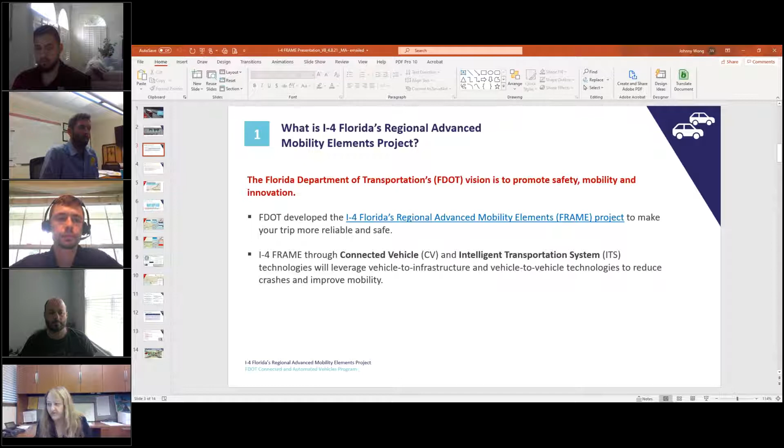What is the I-4 FRAME project? As you know, our vision for Department of Transportation is to promote safety, mobility, and innovation. And the I-4 FRAME is a connected vehicle and ITS project, and the technologies associated with it will leverage vehicle-to-infrastructure and vehicle-to-vehicle technologies to reduce crashes and improve mobility. Next slide please.

Why do we need the I-4 Frame project?

As we know, the I-4 corridor from the East Coast to the West Coast, from Tampa to Orlando, is an artery for economic activities. Also, we have 75 million visitors that visited Orlando in 2018.

Every day, 150,700 vehicles travel through this corridor. From looking at the crash data from 2016 to 2018, 45 fatal crashes and approximately 2,100 injury crashes were reported on I-4. If any of these crashes result in a fatality, the roadway will be closed for approximately 4 hours for the homicide investigation.

I-4 averages 2 lane closure events per day and 1 full directional closure every 11 days in 2018. So based on this crash history and the congestion, it makes the travel time unreliable, and it also decreases safety. This is the reason why this project is so important.

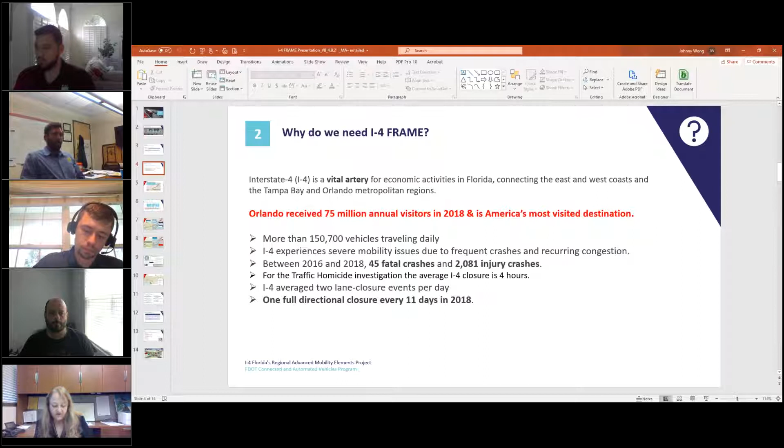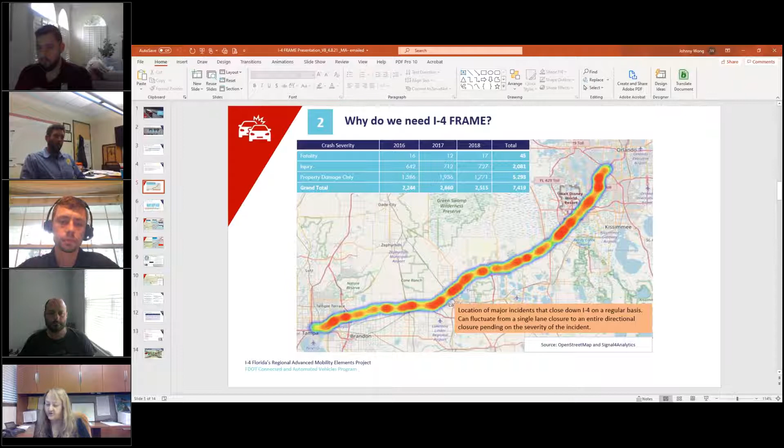Where is the I-4 Frame project going to take place? As I said before, it's going to be from Tampa to Orlando. It's going to include 77 miles on I-4, 200 miles of arterials, which is basically the surface streets between these areas, and it's going to communicate with 381 traffic signals.

The project will be installing ATCs, RSUs, CCTV cameras, and Bluetooth detectors at key decision points along the diversion routes, which I will share with you in the next slide. Specific signals will also include vehicle detection, both radar and video, and blankout signs to help assist motorists at these decision points.

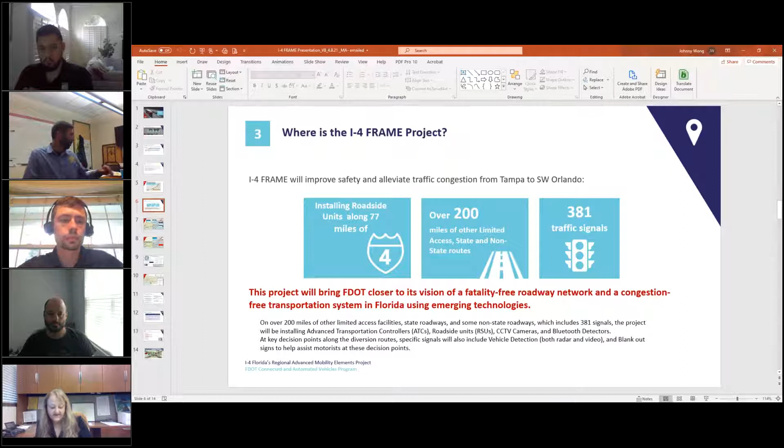In District 7, it's going to include 25 miles of I-4, 80 miles of arterials, 30 miles of the State Road 60 CAV project, and 3 miles of the Turnpike. District 1 will include 30 miles of I-4, 100 plus miles of arterial, and 24 miles of the Turnpike. You can also see District 5 and the Turnpike.

As many of you know, the District 1 improvements will be managed out of the RTMC for District 7. The reason I wanted to share District 5 and the Turnpike with you is, after all, this is a regional project, and there are many destinations within this region, from the international airports, from universities, from Walt Disney, and many other destinations.

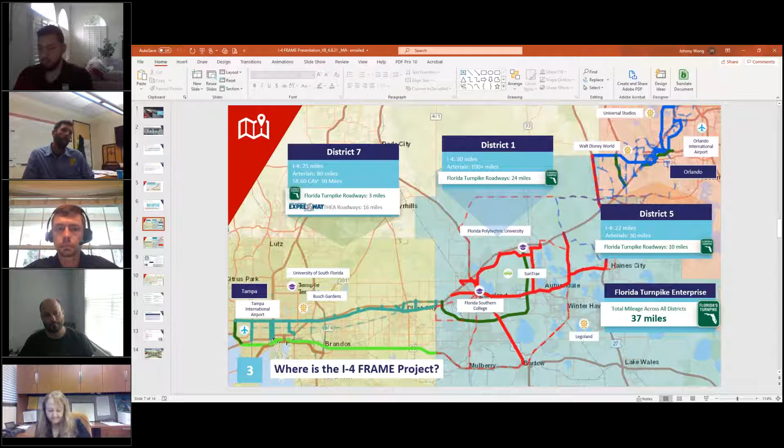So again, this slide shows where the I-4 Frame project is. There are a lot of colors on this slide, I understand, but what I want you to concentrate on as far as what's happening at District 7 is the area on the left. What does this project do?

The main concept and the main improvement as far as safety, and giving the traveling public alternatives in case there's a backup on I-4. As I said before, the I-4 is the brown, and on the left side you can see there's a teal color that shows the primary diversion routes for I-4 backup, and that's Hillsborough Avenue, in teal. The secondary diversion route for District 7 is MLK, which is a dashed teal line, and that is also in conjunction with State Road 60 as a secondary route, which gives the traveling public alternatives during the congestion of I-4.

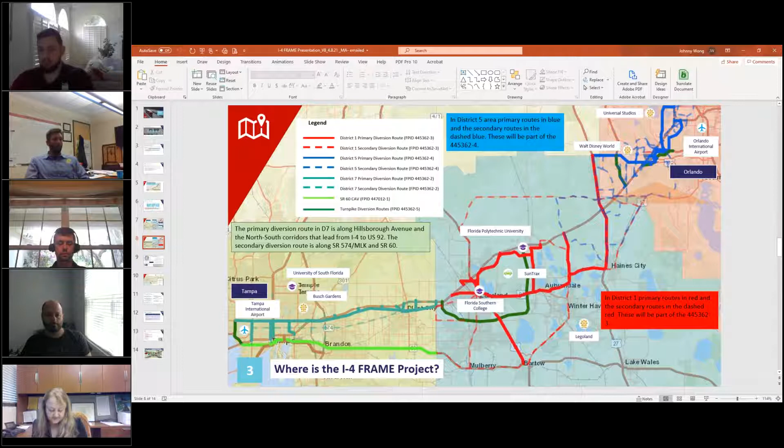Now, as far as how the I-4 FRAME works, many of you are familiar with these terminologies: the roadside units, the onboard units, and the detection devices. The main function of the roadside units is to facilitate communication between vehicles and transportation infrastructure by transferring data over dedicated short-range communication and cellular vehicle-to-everything, CV2X. The RSU gathers the basic safety message from the onboard units and other local traffic systems and communicates the data back to the RTMC. The information is analyzed, and the traveler information message is broadcasted from the RSU to the vehicle's OBU in order to provide information to the motorist.

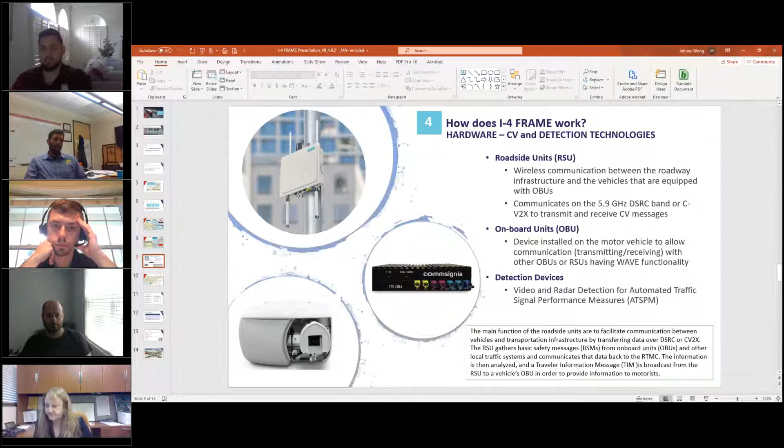RSUs will be installed at roughly 1 mile spacing along the limited access facilities, I-4, I-275, I-75, and we're going to use existing cameras or embed poles to install them.

On the arterials, the RSUs will be placed at all intersections, selected mid-block crossings, and emergency signals. At major destinations, as I mentioned before, we're going to have the CCTVs, Bluetooth detectors, video, blankout signs, and detection being added so we can get automated traffic signal performance measures at these locations.

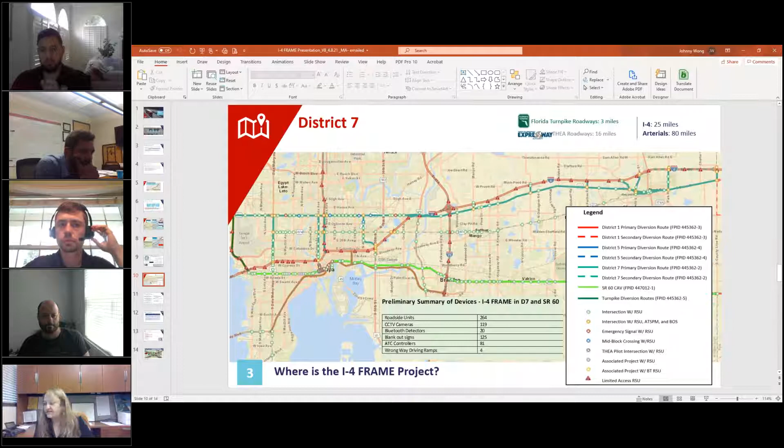So how does the I-4 frame work? Which devices will be talking to each other, and what are the elements and notifications that travelers will be getting?

For instance, it will have the traffic incident management element, which would broadcast traffic incident information to vehicles, about maintenance, about construction information, about evacuation routes.

It will have the speed harmonization message system, which broadcasts vehicle speed advisories to warn drivers of reduced speed recommendations based on the roadway condition ahead. This is important because it gives drivers an idea that they need to slow down, and hopefully this will minimize rear-end collisions.

The work zone traffic management is very important, especially in Florida, where there's a lot of roadway construction going on to improve our roadways. This broadcasts information on back of queue, roadway hazards, roadway weather conditions, and roadway surface conditions for construction projects.

Freeway back of queue warning broadcasts vehicle stoppage to minimize or prevent rear-end or other secondary collisions. For instance, you're coming around the curve and traffic has stopped in front of you—it gives you a message that you need to slow down and potentially stop.

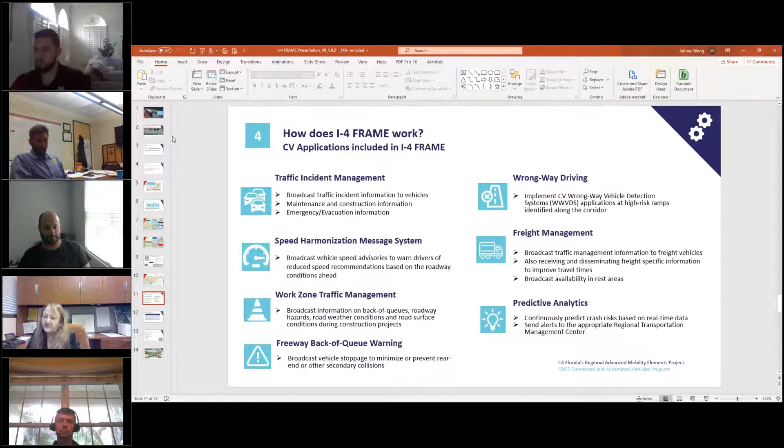And the last is predictive analytics. As we all know, this is very preliminary, and I think the City of Tampa ATMS project, by using historical traffic information, is probably one of the first projects that's going to be able to provide this information.

As I mentioned, there are two contracts. Contract number one will include the I-4 frame project in District 7 and the State Road 60 CAV project. The design will be completed in November 2021 for both projects, and the contract will be let, with the contractor selected in February 2022.

Currently, these are the approximate budgets: 11.5 and 1.7 million respectively for these two projects.

The second contract will include District 1, District 5, and the FTE portion of the I-4 frame. The design will be completed in March 2022. The contractor will be on board in July 2022, and the approximate budgets are 9.3, 3.7, and 1 million respectively for those projects.

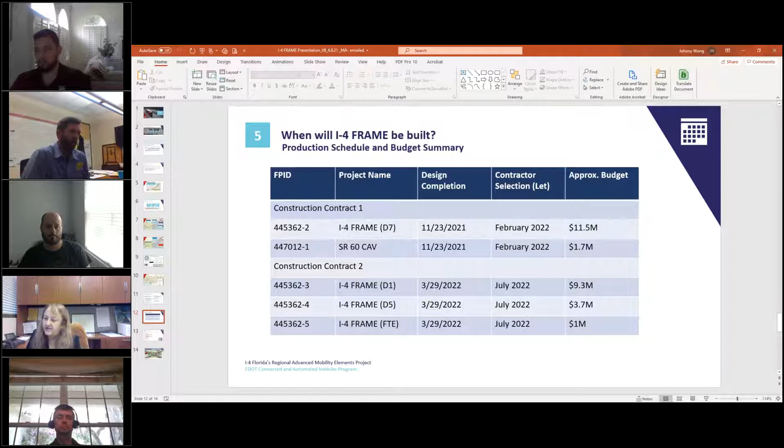The department has already selected the consultant working on this project, Metric Engineering. As I mentioned, Dale Cody is also on this call for any questions regarding the project.

Design completion, as I mentioned, is November 2021 for the District 7 portion, and the rest in March 2022. Construction will begin for District 7 in June 2022, and for the rest of the project in October 2022. And that's the end of my presentation.

This one we don't have to use, I just put it there for information, but I think we can leave it out.

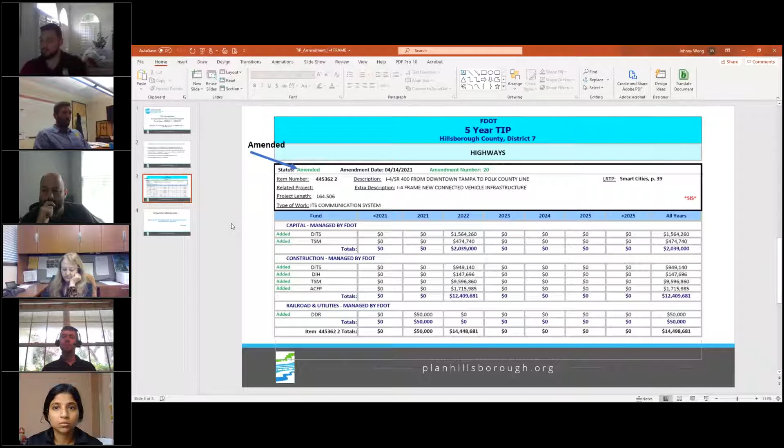And maybe if there's no messages to pass forward, maybe a statement along the lines of, if we were able to take action on this, we would have supported it. All right, I think it's okay. Let's do this then. Passing along the message that in the absence of a quorum, we are unable to recommend as a board approval. However, we would anticipate making said recommendation when we're officially able to do so.

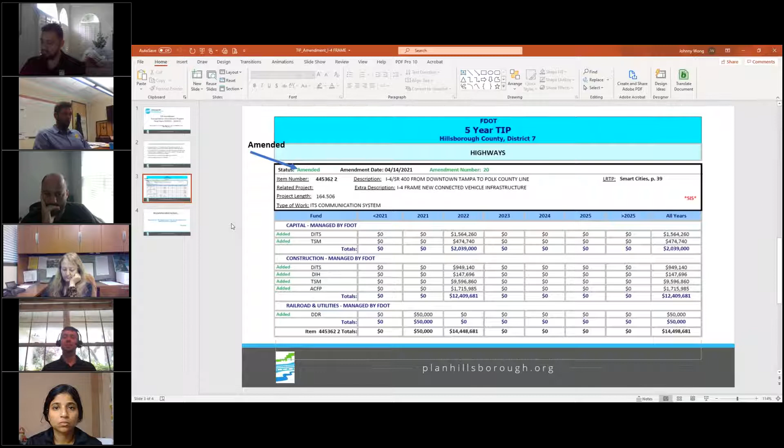Does that adequately speak for the board members present? I think so. I did not suspect any opposition to that. Okay, so thank you all, and thank you, Vishaka.

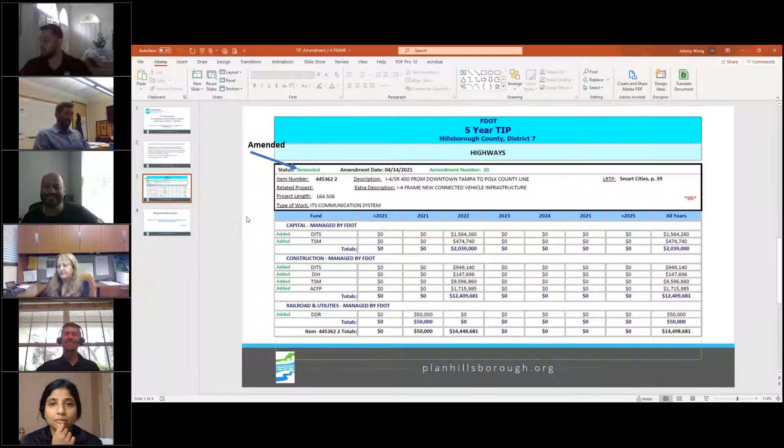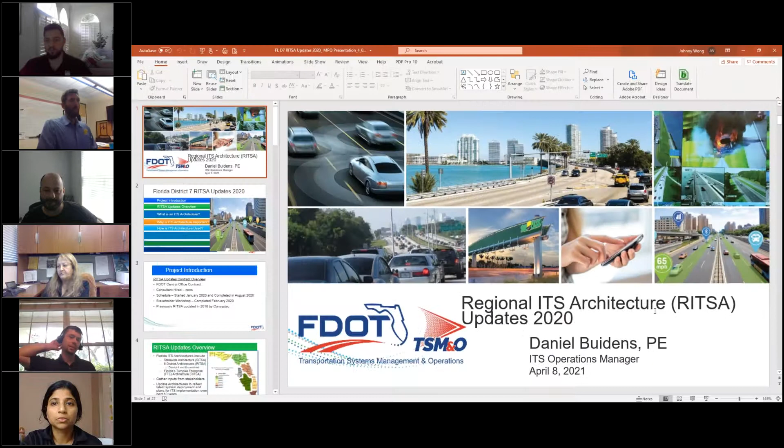And with that, we can move on to the next item on the agenda. Actually, I'll say, sorry, that was going to be our in-roadway lighting presentation. We had a little bit of a scheduling snafu on that, and it's going to be tabled until our July meeting. We can look forward to hearing all about that. I've heard it's a compelling presentation that should hold our interest well, but we won't be hearing it today.

So with that, I will turn it over to Dan Buidens to talk about the regional ITS architecture update. Thanks, Brandon. Thanks, everybody on the call. I don't know if I can promise a compelling presentation, but I certainly can promise that it will be informative. I'm Dan Buidens, the ITS operations manager here at FDOT at the Tampa Bay SunGuide Center. I'm going to present to you guys the regional ITS architecture update.

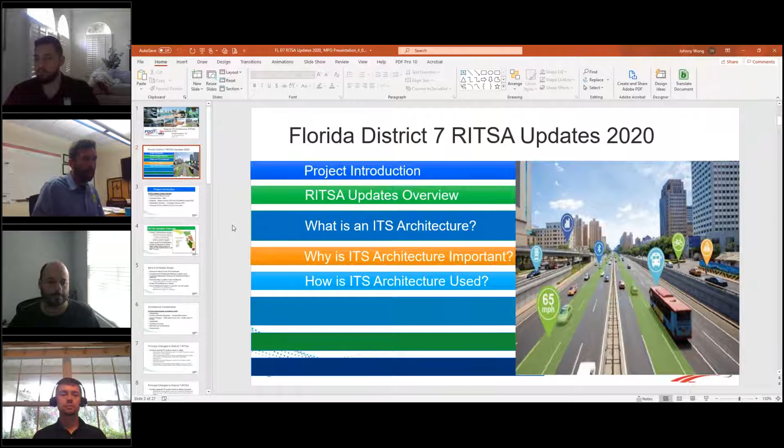Let's go ahead and just hop into it. Next slide, please. So in today's presentation, I'm going to cover the update that was done in 2020, but I want to introduce what the project was about, what a RITSA update really is, what is ITS architecture, why it's important, and how it's used. Next slide, please.

Just to introduce the project, the RITSA update was put out to bid by the central office, and the consultant hired was Iteris. The work was scheduled to begin in 2020, and the team was selected at the tail end of 2019. It involved a stakeholders workshop, one of the very beginning activities, completed in February of 2020. Previously, the RITSA, or Regional ITS Architecture, was updated in 2016 by a firm called Consystec, then taken over by Iteris in 2020, hired out by the central office. Next slide, please.

Just to give you a brief overview of the RITSA update: the Florida ITS architecture has a statewide architecture that's further broken down into different regions of the state. There are basically 6 regions composed of the FDOT districts. District 6 and District 4, down in the southeast portion of Florida, are combined as one region. I think they have enough characteristics and elements that those were combined as one whole RITSA for that area.

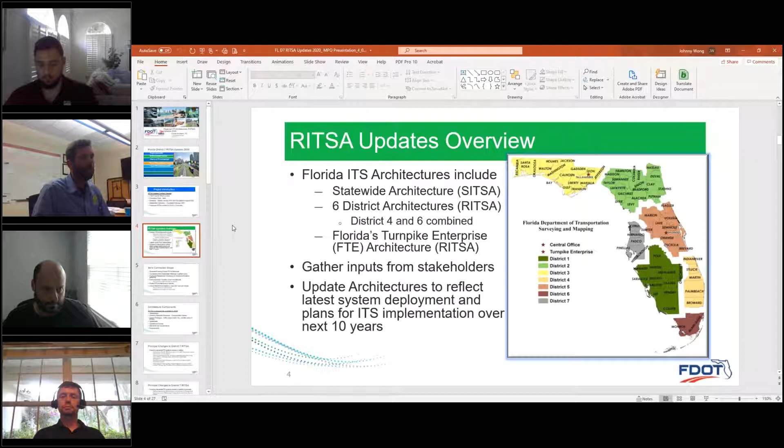Basically, the RITSA gathers several different pieces of information and input from stakeholders about upcoming ITS projects, then assembles them into a statewide architecture, or primarily first a regional architecture. The update is usually done every 10 years, but as I said, it was last done in 2016 and picked back up in 2020. I think as technology evolves more rapidly, we're going to shorten that update cycle. Next slide, please.

To give you some idea of what Iteris was contracted to do: first step was to review the existing architecture, and then they conducted stakeholder meetings to gather different inputs. Once they first introduced what they were looking for to the stakeholders, they conducted a more focused stakeholder workshop to broaden information gathering. Then they performed major updates to the architecture and documented everything in extensive reports, assembling it all into an ITS architecture website, which I'll share the link to later, and this slideshow will have a hyperlink to that website.

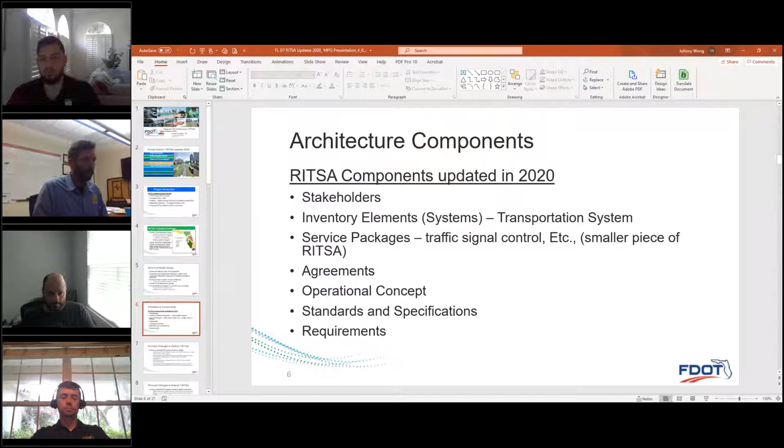So just to give you an idea of some of the principal changes to the District 7 RITSA: it looked at and inventoried all of the different elements in the ITS systems, and those elements were revised, either added or omitted, depending on if they were completed or not.

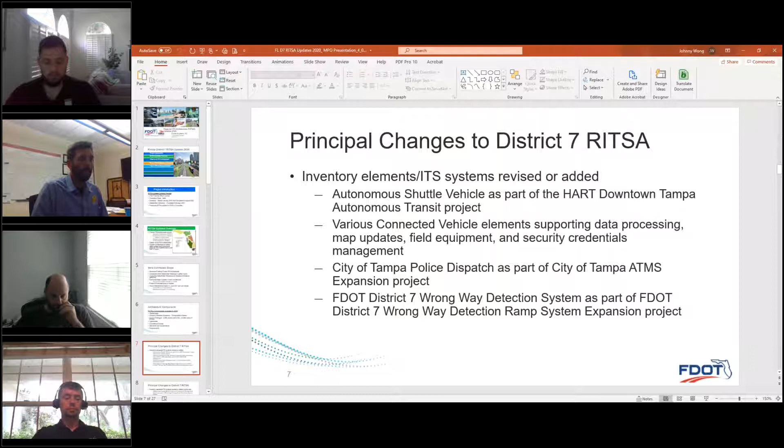Just to give you some examples of elements: think about the autonomous shuttle vehicle as part of HART's Downtown Tampa Autonomous Transit Project, or City of Tampa's police dispatch as part of the city's ATMS expansion, or possibly FDOT's wrong-way detection systems as part of the wrong-way detection off-ramp expansion project.

Just to give you another example or two: Hillsborough County MPO Transportation Data Analytics System as part of the county's MPO Data and Analytics Platform, or PSTA's Intermodal Center as part of PSTA's Intermodal Center project. So those are some examples of elements.

The elements provide services, and the services are pretty much data package exchanges between the elements. This update cycle added over 125 new services, but when the Iteris team looked at everything, they noticed a lot of multiple instances, such as parking space management being a new title. The city may have a parking management program in or around a stadium, the county may have their own parking management, and Pinellas County may have their own parking management for some of their attractions. So there was some overlap in titles, but the takeaway is that 125 new services were identified.

Continuing with the principal changes, some projects were identified. The projects are integrated, and as they're completed or deployed, they come back out of the RITSA. There were 56 new projects identified when all the stakeholders were interviewed and presented their projects in those workshops. Some of those include District 7's Gateway Expressway project, the Howard Frankland Bridge construction from FDOT, HART's Downtown Autonomous Transit, or Pinellas County's Traffic Management Center upgrades.

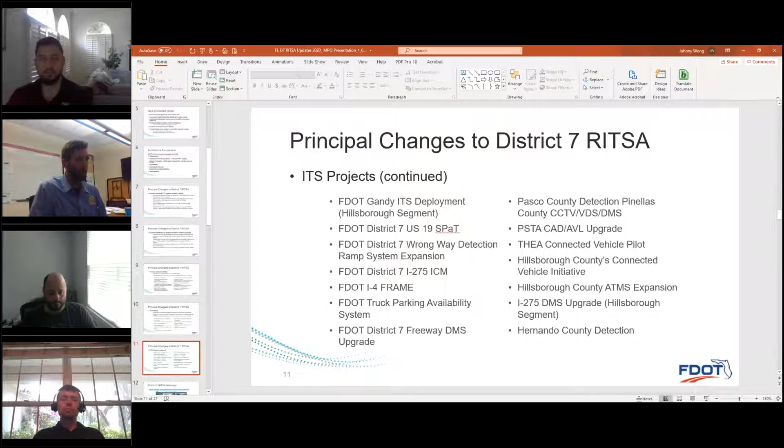So what are some of the impacts of the RITSA? It reflects all the latest ITS deployment and plans. It catalogs and tracks all of these planned things coming down the pipeline for the future. It provides a baseline framework to help planners from different agencies and stakeholders identify what elements their counterparts are working on.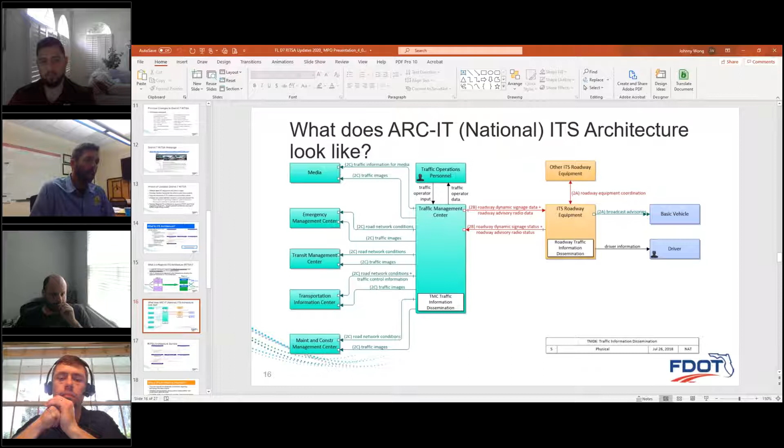This is the general template for the workflow and what the architecture should look like. Then we can get into the next slide, which gives a more granular example of a regional architecture. Here we've got, this example is like the HART transit vehicles. The HART transit vehicles are cruising along, using the roadway network.

They may communicate with traffic signals and try to use preemption and take signal priority to move the bus. That call out goes to the field equipment, and that field equipment is tied back to the traffic management center. That traffic management center may also receive calls from fire rescue, who also may preempt a signal. All the while, those services are tied back to field equipment that's going to actually change the signal, and it's all tied back to the TMC. So we've got some human element oversight over some of this, and this is just a more realistic example of the architecture.

So just for that one example of emergency vehicles interfacing with roadside equipment, or transit vehicles interfacing with the equipment in the TMCs, it's a realistic example of the architecture. You can see there's many services, many stakeholders or elements, and all the while, as a project is assembled, this tool would really help us identify who needs to be connected, who needs to be notified, who we need to make sure we have physical connections and communication lines. That's how the architecture works, and that's how it's really a helpful tool for planners and project designers.

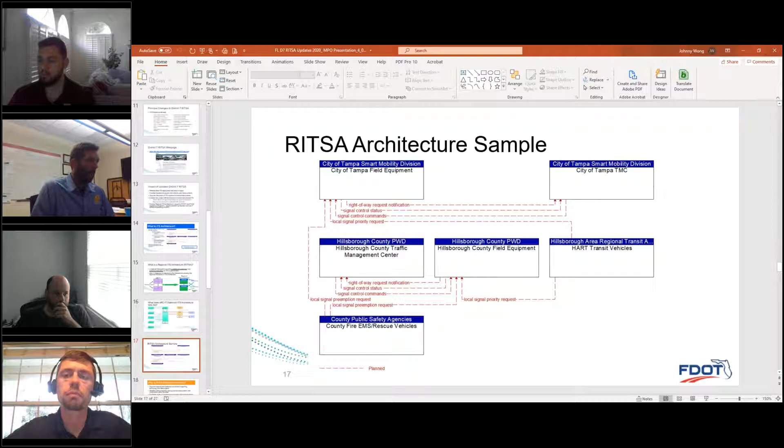So why is it important? As I said maybe a few times, it supports regional and statewide coordination regarding technology and data projects. It identifies interconnectivity amongst various transportation and modal plans within the state, facilitates the ability of jurisdictions to operate collaboratively and harness the benefits of a regional approach, all while adhering to federal regulations.

So again, why is the architecture important? It captures and documents agreements between the stakeholders about their visions, and builds a framework around which ITS will be implemented in a region, and establishes reference for all the stakeholders regarding ITS. It identifies interconnectivity among the regional transportation and modal plans, and facilitates the stakeholders' collaboration and ability to harness and get benefits of a regional approach to the transportation challenges.

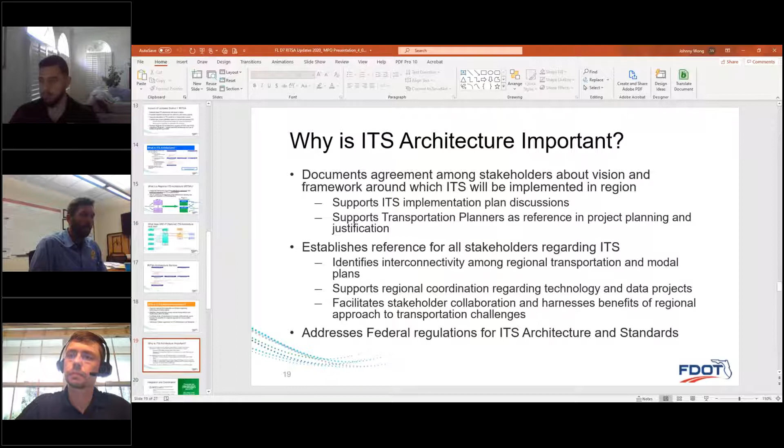A perfect example is the City of Tampa ATMS, where we're co-locating a lot of fiber and existing conduits, and having a deep understanding of that existing architecture really helped facilitate and streamline the project. Next slide.

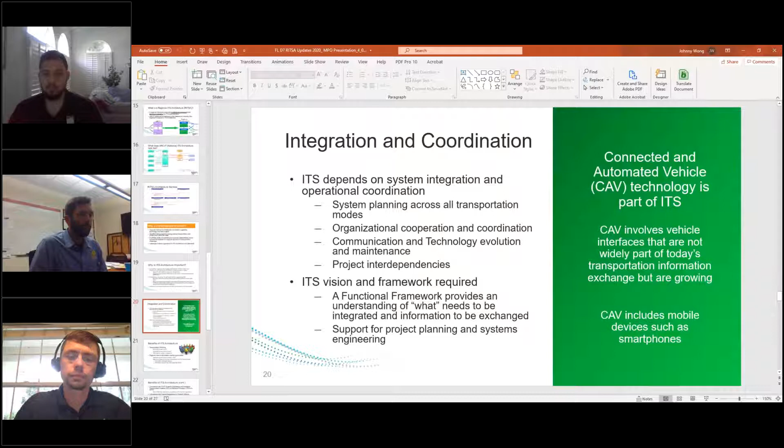Again, as I mentioned, it's strong and important for integration and coordination. The connected and automated vehicle technology is a part of ITS. It's not fully developed yet, but it's certainly right around the corner. Having a deeper understanding of all the ITS elements, infrastructure, and connections is really going to be key to deploying that connected autonomous vehicle program in the region. Next slide.

So again, covering some more of the benefits: it's mostly used for planning. It answers the questions of what ITS do we have, what ITS do we plan to have, how are we going to integrate that, and how are we going to tie that into the different parts of the region. It gives you a regional view of information sharing opportunities.

A lot of times an agency may only focus on their stuff, kind of having a narrow view. Being a participant in an architecture setup like this really brings to light what your counterparts and stakeholders all have available. It really breeds collaboration - we're all here to work together, perceptionally we're seen by the public as one government. So if we can all move in the same direction and complement each other with the deployments we've already done, I think we're going to better serve the region, Tampa Bay as a whole.

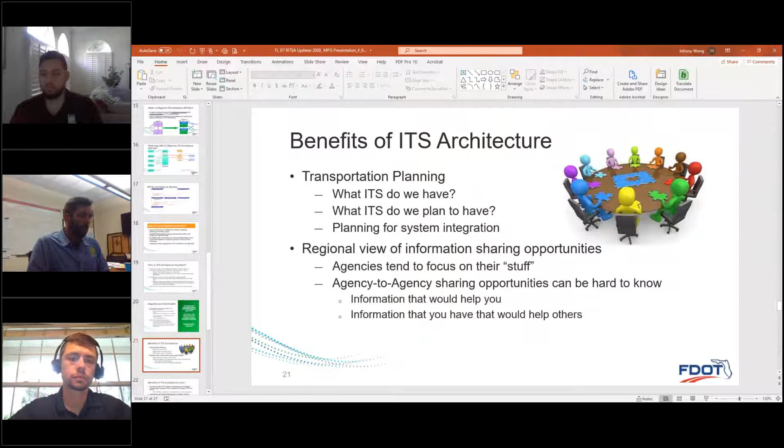And let's see. I think I covered that. Okay, next slide, please, Johnny.

Okay, so how is it used? When you're planning ITS, you want to gain a consensus among the stakeholders about what's out there and what they're planning, and it kind of eliminates any duplication of work. You can build something that complements your counterparts' projects. When it comes to project development, RITSA projects provide project architecture satisfying federal highway, or FHWA, regulations.

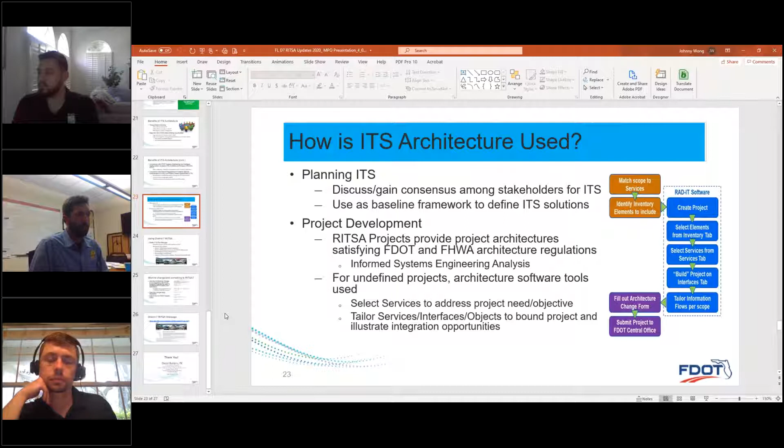And for undefined projects, you can use a software tool called RAD-IT. RAD-IT is another acronym - it stands for Regional Architecture Development for Intelligent Transportation. So if you don't really know what your project requirements are, you can go into this RAD-IT platform and start using some of the drill-down types of questions that it asks you. You can almost develop a project or a plan using that software. It seems like a helpful tool if you don't know where to begin. Next slide.

Go to the next slide, please. So here is a picture of the change request form. If I was presenting in person, I would zoom in on this for the audience. Do you mind trying to zoom into that a little? I hope I don't cause any technical difficulties.

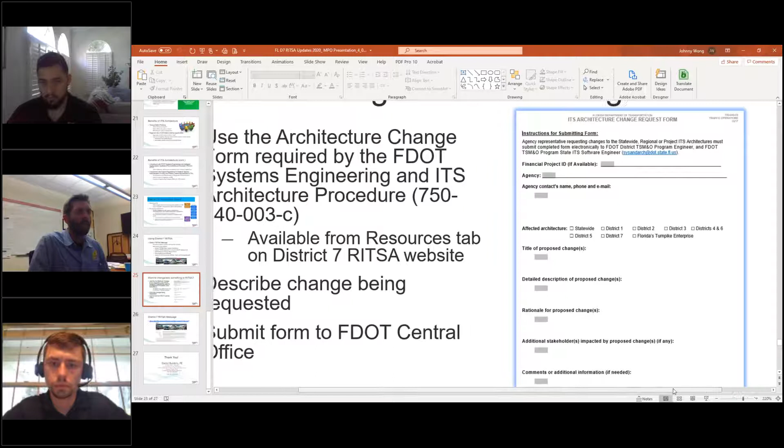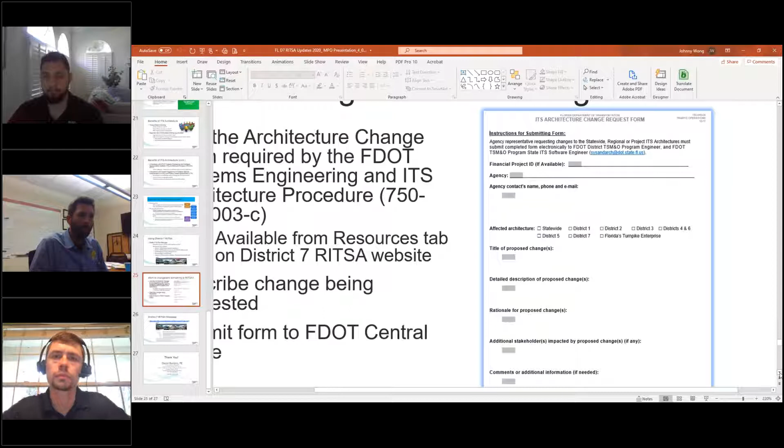Okay, excellent, thank you. So what you want to do when submitting this form is identify if you have a financial project ID number and put that there, identify your agency, and put as much contact information as you can because they will be reaching back out to you. Identify which part of the region will be affected by this project. Describe any proposed changes in as much detail as you can, and justify your rationale for why you want to make the change.

Identify any additional stakeholders, and again, if you put good contact information, they'll reach back out to say, did you consider these guys, or walk you through the process. Also put any additional information you have—go as far as you can with good descriptions. If you have any concept development, concept plans, or other documentation like a con ops, you can list those attachments and send them over as well.

This form is the first step to getting your project rolled into the RITSA, and it's easy to use and access—it's all there on the resources website. If you really have trouble, ITERIS is there to help, and that's all worked out through the FDOT central office. So even submitting a half-completed form is fine—if you don't know where to go, you can certainly reach out for more help.

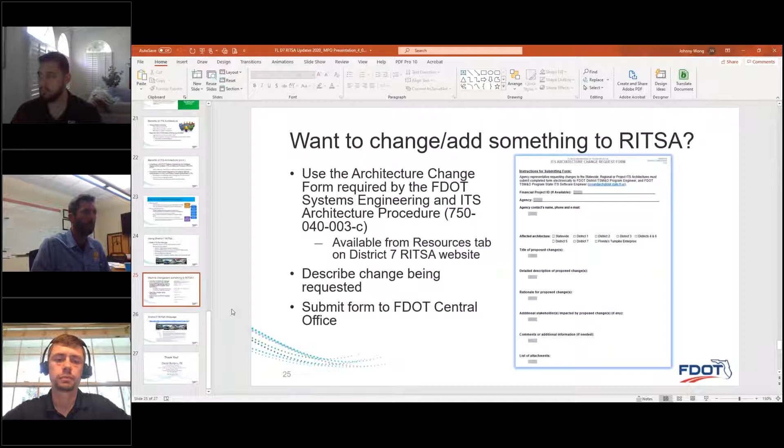I encourage you all to check it out. If you're not already a participant or stakeholder who participated in the last update, I encourage you to try to be part of the next one. That maintenance cycle is going to be in June of 2021. Next slide.

I had a quick one, Dan. On the change request form, how regularly are you receiving and processing them? I was kind of curious what the volume of the maintenance effort is in between planned major updates.